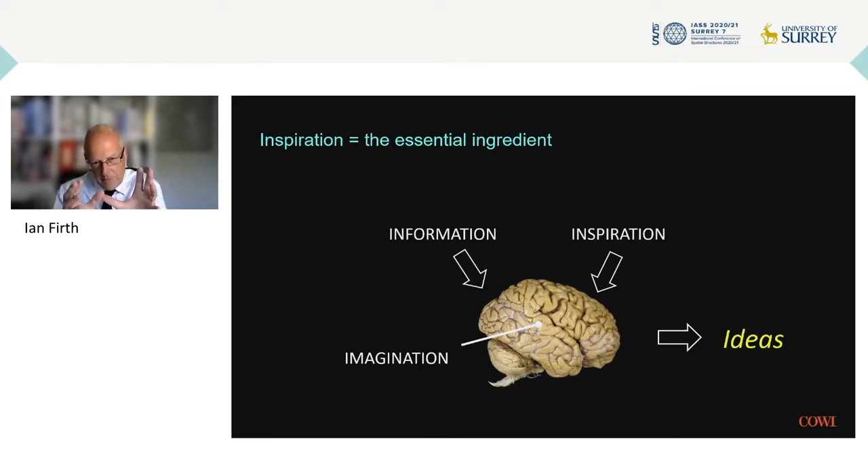Inspiration is a vitally important part of what we do. The stuff that goes into my brain, your brain, is a mixture of stuff, and we use our imagination to make sense of it all in order to generate ideas. But broadly speaking, it's information, the stuff that we learn, research, experience, all the important knowledge that we gain through our careers, that allows us to do the engineering that we do. But without inspiration, it comes to nothing. We need inspiration. So I was delighted to see that topic. And I asked myself, where do we get inspiration from?

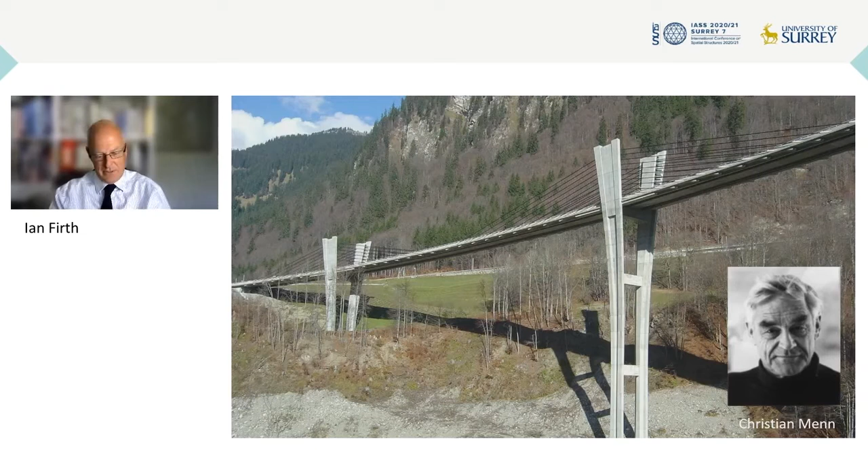Of course, we get inspiration from people. I could list a long list of people. Here's Christian Menn with his wonderful Sunniberg Bridge in Switzerland. Jörg Schlaich is somebody who has been a great inspiration to me. And of course, his son, Mike Schlaich, the firm in their names, Schlaich Bergermann and Partner, continue to inspire people all around the world with the work that they do.

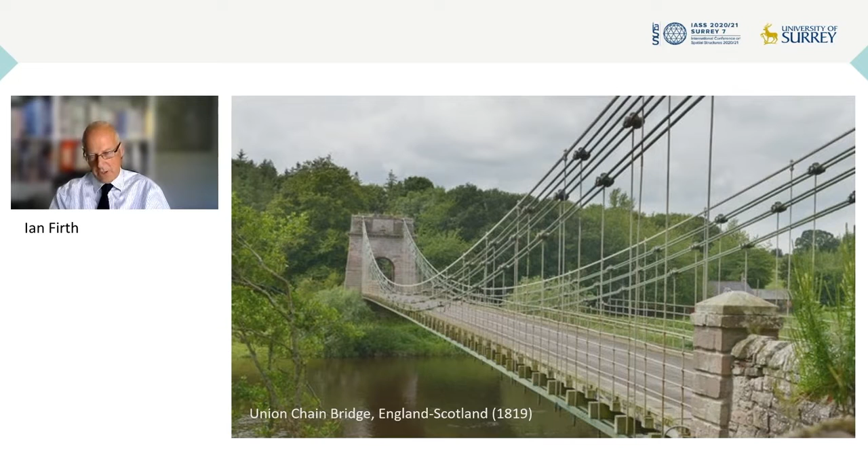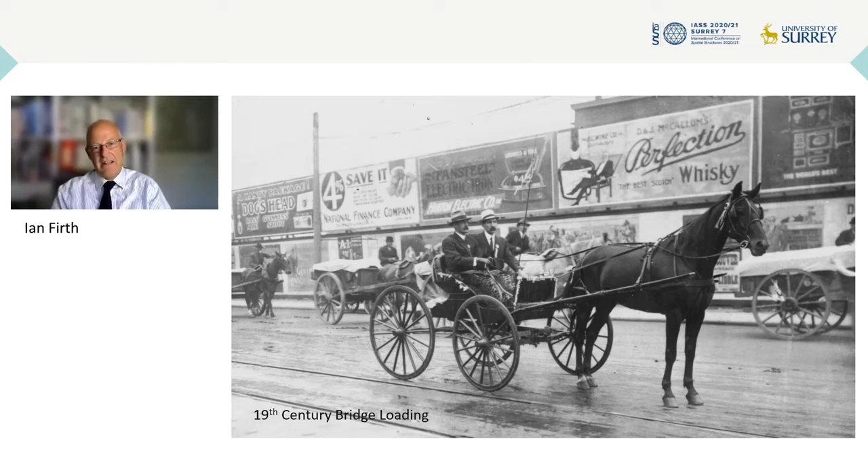Let me think about an inspiration from Captain Samuel Brown, who designed the fabulous Union Chain Bridge on the border between England and Scotland, almost exactly 200 years old. It's currently going through renovation, but it still carries traffic 200 years later. The astonishing thing is that when he was designing it for things like this... actually, this photograph is about 100 years later than the bridge, because there's reference to electric something behind the carriage. So this picture doesn't date from Samuel Brown's day, but you can imagine he had no idea what was coming. This kind of thing was unimaginable 200 years ago.

So do we kid ourselves when we say we're designing for 200 years? We have absolutely no idea what we're designing for. We don't know what materials we'll be using. If we design something today for today's conditions, we need to think very carefully about how it's going to last. Going back to this idea of inspiration - if I, in my tiny career, have been able to inspire anybody, it would be to ask: how do we ensure a future? Can we do better next time? Because there are also things I would certainly not do the same way again.

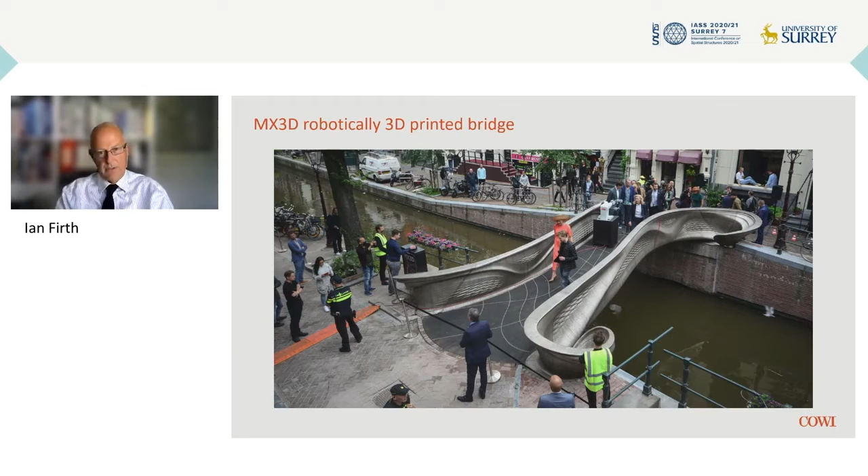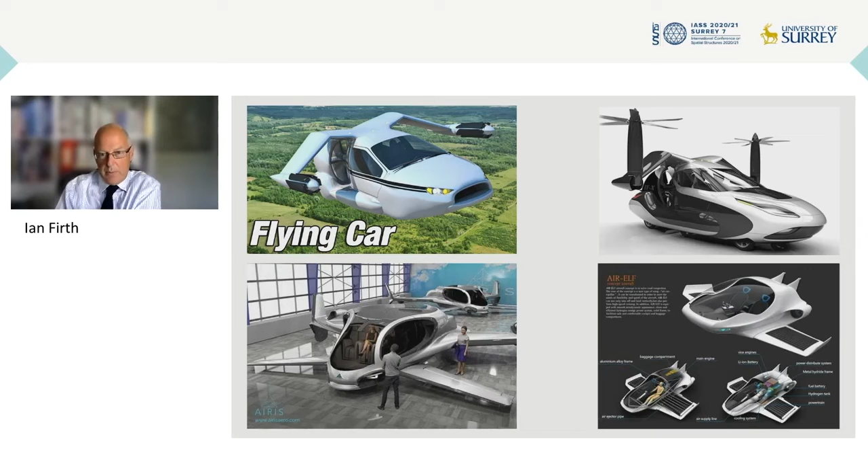And we're into the age now of 3D printing. This is the bridge in Amsterdam, finally installed after a lot of waiting - 3D printed steel. We'll probably be talking about flying cars. We've already got autonomous electric vehicles, which were unimaginable just a few decades ago. These things will be coming, and goodness knows how we'll be traveling in the future. So are we aiming at some kind of ghastly future city, the sort of stuff of science fiction? What are the implications of that? Or are we possibly looking at a future city in 100 or 200 years' time?

I give credit to Will Arnold at the Institution of Structural Engineers for this chart. I hope it's clearer on your screen than mine - it's all rather blurred. What this shows is energy-related carbon dioxide emissions per sector, and the large blue slice is buildings - 39%. That's due to buildings, transport, other industry, and the other slices. The biggest part, by a long way, of energy-related CO2 emissions is due to buildings. That's the stuff you and I are involved in.

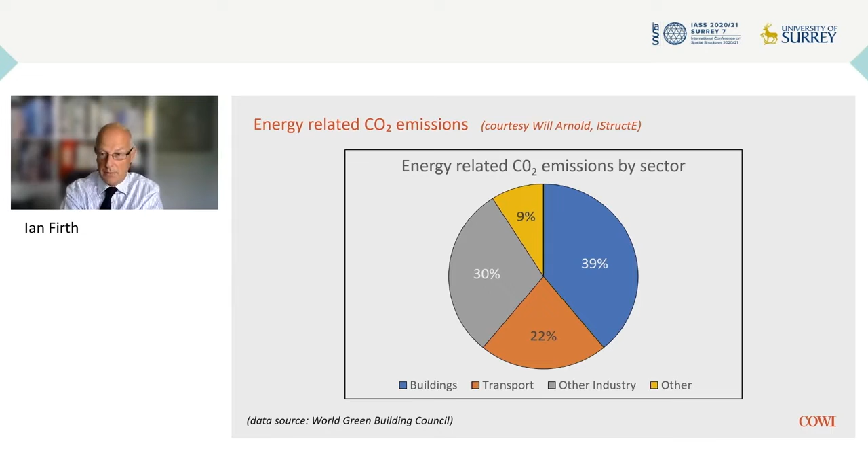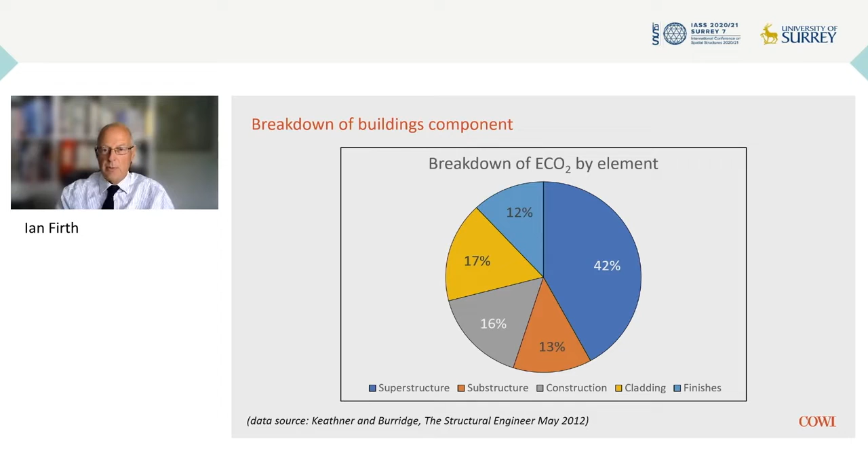Building structures - if we break that down further, superstructure is the largest bit. Now, the delegates for an IASS conference are largely people who deal with superstructure. So the awakening for me in summer 2019 was that structural engineers are playing a very big part in creating the biggest problem currently facing the planet. I'll say it again: structural engineers are playing a very big part in creating the biggest problem currently facing the planet. It's not aviation, the food industry, clothing, or manufacturing - it's structural engineering. It's building structures. It's the stuff we do.

It's the biggest part. And right now, certainly two years ago, our professional institutions and associations didn't require us to do anything about it. Now that's changing, I'm glad to say, because I think not only I, but many others, had that wake-up call. That alarm went off in the summer of 2019. It was too late, but at least it's gone off.

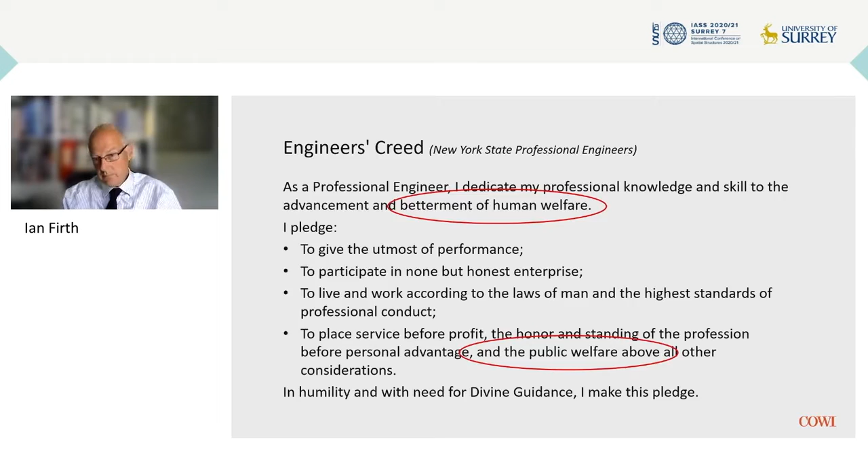Thankfully, last summer, 2019, that was taken up. The UK Structural Engineers Declare, the Institution of Structural Engineers, set this up, following the lead from the Royal Institute of British Architects. And now, around the world, this has been picked up - the declaration about climate change and biodiversity, the emergency that we face.

I haven't got time to go into all the things, but I would urge every one of you listening today, if you don't know what this declaration says, and if you haven't yet signed up to it, please go to Engineers Declare or Construction Declares - just Google it and it'll come straight up - and educate yourself about these things. We all need to sign up to what this is about. So there's my soapbox over.

But the Institution of Structural Engineers, I would say, is really leading the way in this. Will Arnold, who I've mentioned before, and Mike Cook, who you will know, I'm sure he's probably speaking at this conference, is leading the effort. I take no credit for it, other than being a bit of a flag bearer. Please do check out the resources there, like the Carbon Tool, because they help.

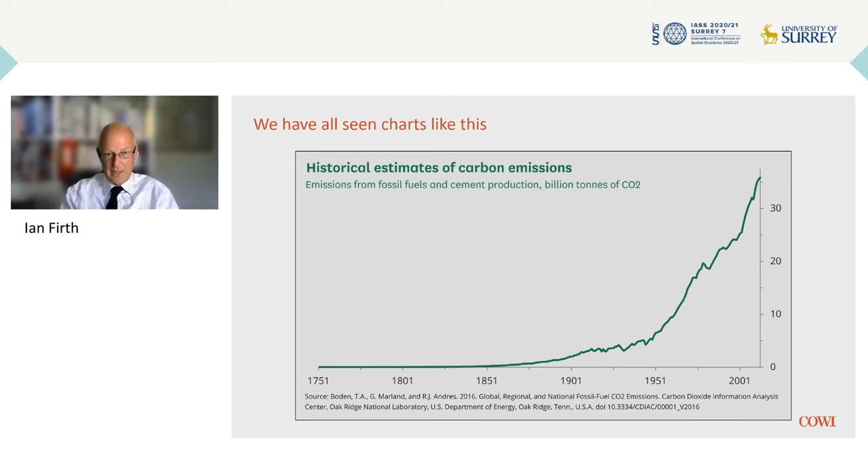We've all seen charts like this, showing carbon emissions growing since the pre-industrial era - a long flat line which then, come the 19th and 20th century, begins to grow, and then growing ever faster. I look back at the title of this conference, inspiring the next generation, and the inference is that the previous generation, my generation, has got something worth inspiring. But if you look at the last 30 or 40 years, I'm not sure we can really hold our heads very high if we're responsible for the biggest part of this.

You could see other charts - this is exactly the same figure but broken down by country. It's very clear normally on my PowerPoint, so I hope you can see it. A large number of countries, for the last 10 or 15 years, the lower curves are all turning down, which is fabulous. So many countries around the world are beginning to address this problem. China and others, unfortunately, are not yet.

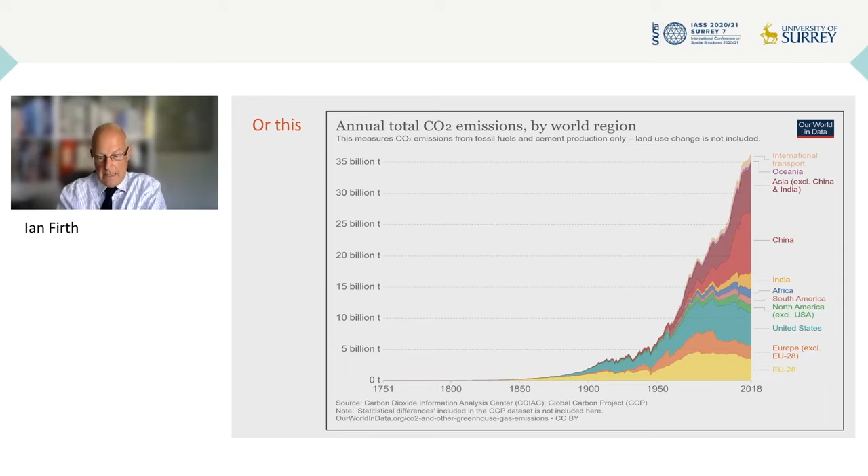So there's a really big issue, and each of us needs to do what we can, even though many people are saying, 'Oh, it's such a big problem, we can't possibly do anything ourselves - what can I do when it's such a big problem?' That, of course, is thinking that leads to disaster. We all need to do something.

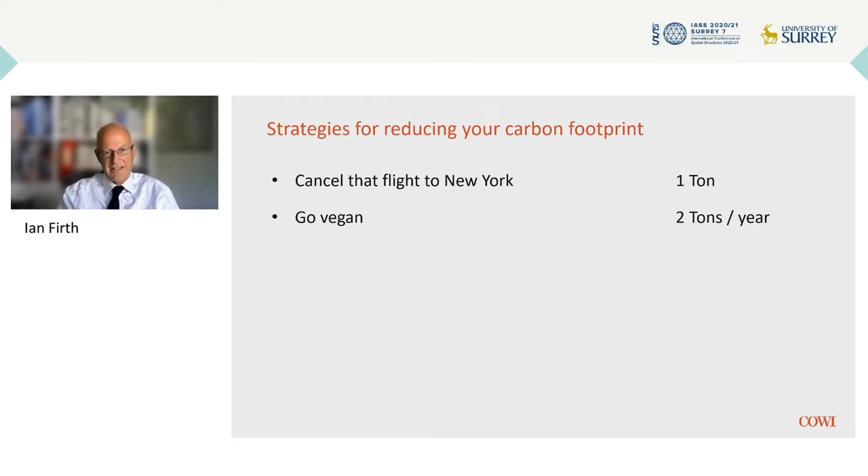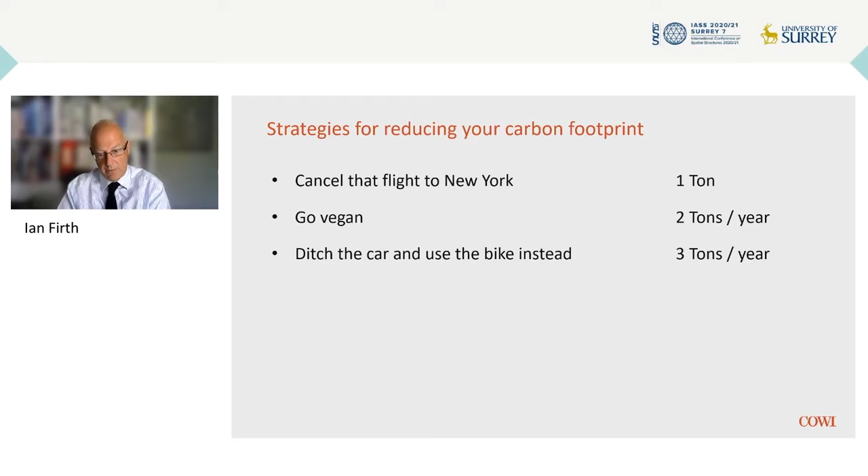And of course we could do it in a small way. You can cancel that flight to New York, save a ton. You could go vegan and save a couple of tons - I'd rather keep my beefsteak. You can give up the car. I've gone a little way towards this because I've now got electric cars, but unfortunately I charge my car from the mains, which is still driven predominantly by fossil fuel. Not until my electricity supply to my house is a responsible supply from renewables will it genuinely be a good thing to go electric.

But here's the thing: we could design our building structures 20% more efficiently. That's actually really quite easy when you start thinking about it, if you look into what we could do. This is based on a structural engineer designing 40,000 square metres of new buildings a year, which is quite typical, with a typical carbon footprint of about 250 kilograms per square metre - quite typical numbers. So you'd be responsible...

If you're doing that, you're responsible for 1,000 tons of carbon a year. So design 20% more efficiently, and you can save 200.

In the bridges world, which is the one I inhabit, it's actually a little bit more difficult to design 20% out. We're already designing to a minimum weight. We have to, because the penalty on weight is that much more significant on very long spans. It's very challenging, but let's say I could design 10% more efficiently, and of course I could if I really put my finger to it and worked hard, and that's based on some new figures down the bottom.

So again, the message is that we have the opportunity. Not only are we a big part of the problem, but we have a big part of the solution in our control. We can do something about it.

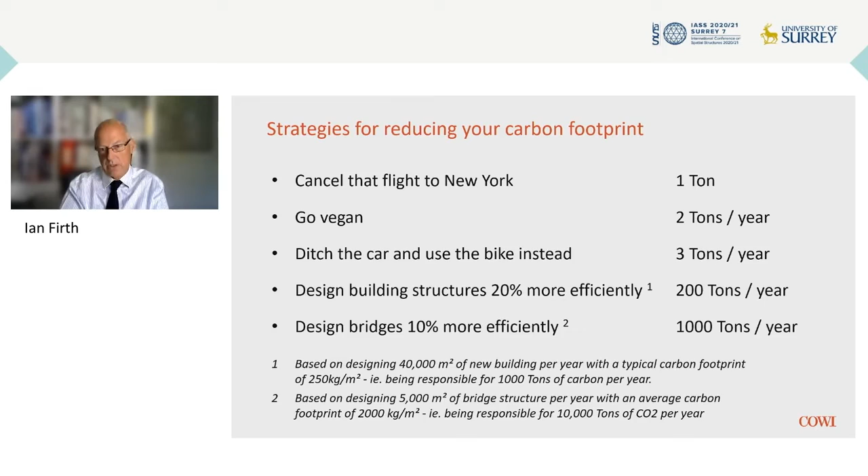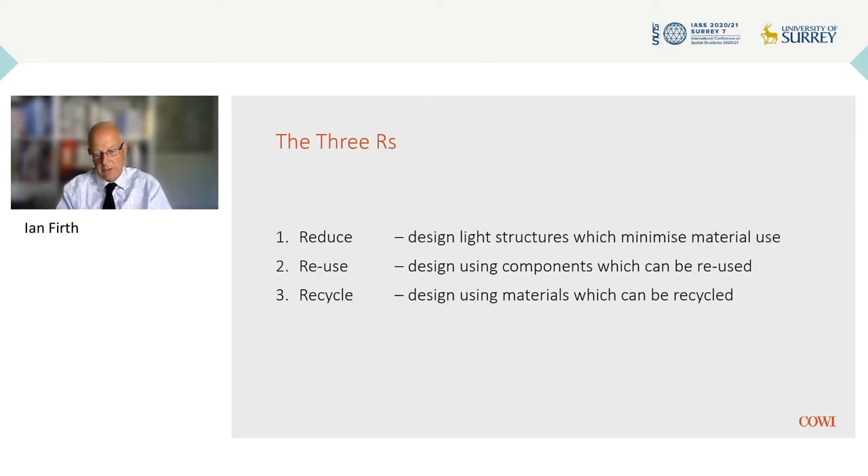So you all know about the 3 R's: reduce, reuse, recycle. Reducing is to go lightweight and use a minimum amount of material. Reusing is very interesting because we're seeing components and modularizations happening, beginning to think about how we can design our structures as components that can just be reused. It challenges us to think in those ways. Recycling, of course, we're already doing quite a lot of that. We could do more. But let's go back to that figure.

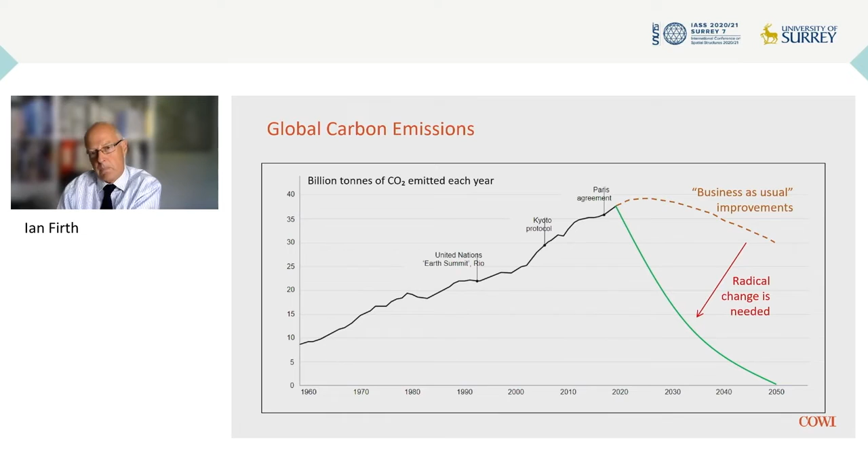But to get to this requires some very, very radical change indeed. And I think if you see that same thing on the earlier charts, it just doesn't look likely, does it? And as we already know from the IPCC report, which was published a few weeks ago, they don't think so either, and the scenarios that they have published are frightening indeed.

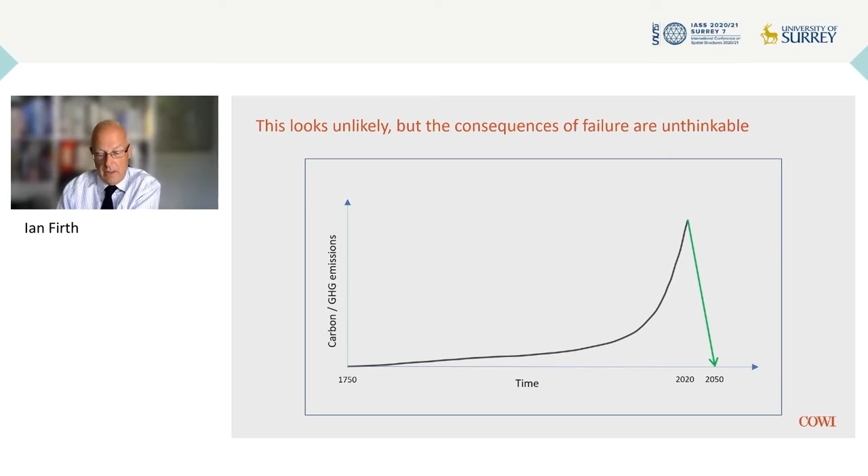So, like I remind you again, we structural engineers are responsible for a very large part of the problem, all right? But we are also able to think about the solution.

So, in terms of inspiring the next generation, I'm thinking that the next generation is going to be inspiring us. So we should be doing more. We should be refusing to build new things, and that's already happening. And we could certainly be regenerating, making much better use of existing structures.

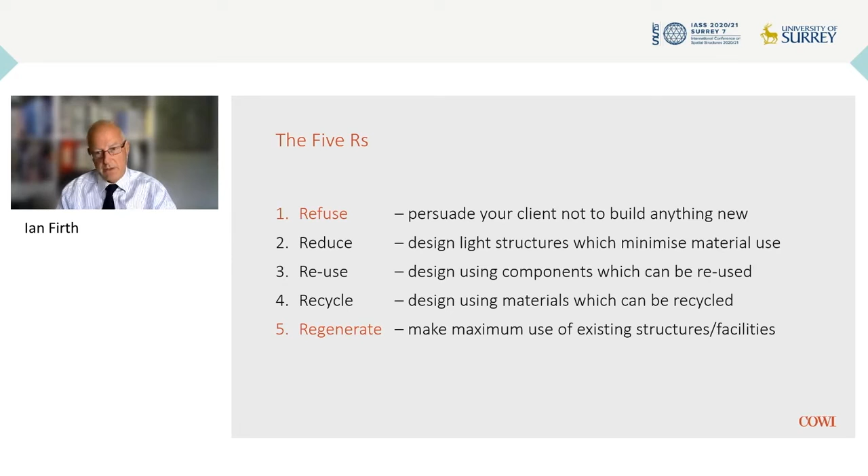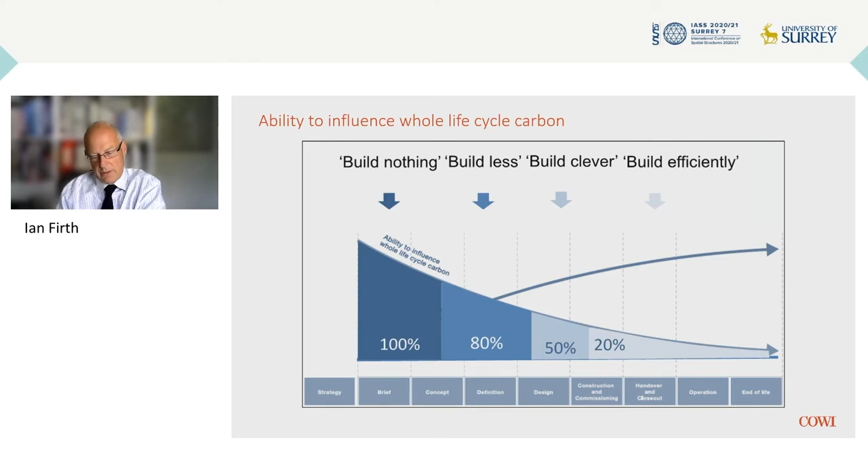And we all know, of course, that the best time to influence the decision is right at the beginning, when we could actually influence the brief, because later on you could tinker with the details, but you're not going to really make much impact. My early career, I started with Flint Neill, as you heard, and relatively early in my career I was working on the strengthening of the Severn Crossing.

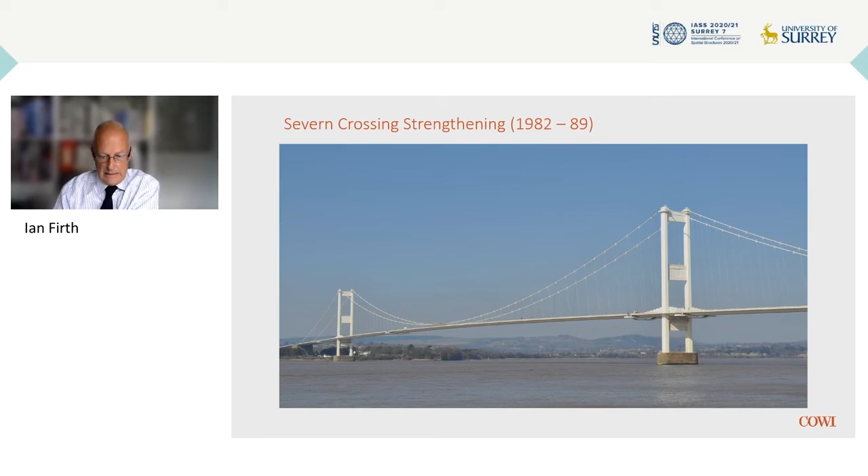A wonderful project to be doing. And of course, back then in the 1980s, I always like to show the picture from this side because I was working on the Wye Bridge, this bit down in the foreground.

But back then in the 1980s, nobody was talking about climate change. Nobody was talking about carbon. But nevertheless, the same principles apply: to keep the asset open, to do the strengthening, to do the minimum necessary to give it a new lease of life.

Brian, you might remember the numbers, but I think we added a few percent to the weight of the bridge in additional stiffening and so on, and increased the live load capacity by, I don't know, 100% or something. I don't remember what it was, but it was a massive change.

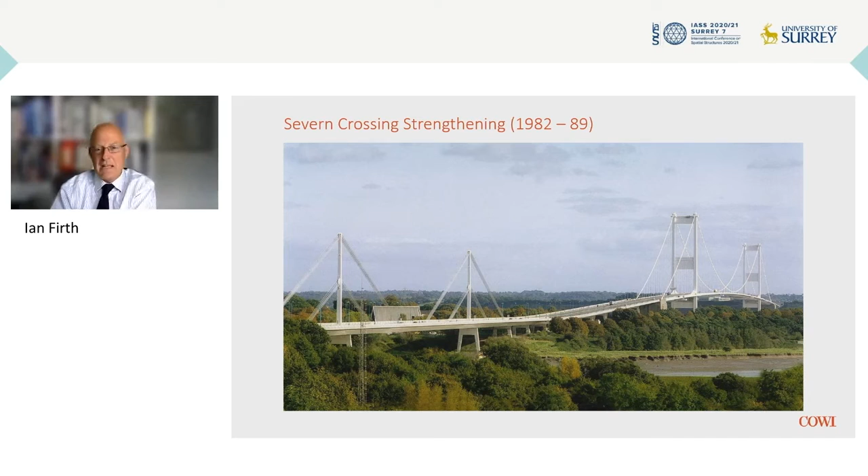That is the sort of thing we're supposed to be doing, making use of existing infrastructure and so on. I'm just going to go a bit more quickly here because time is running short.

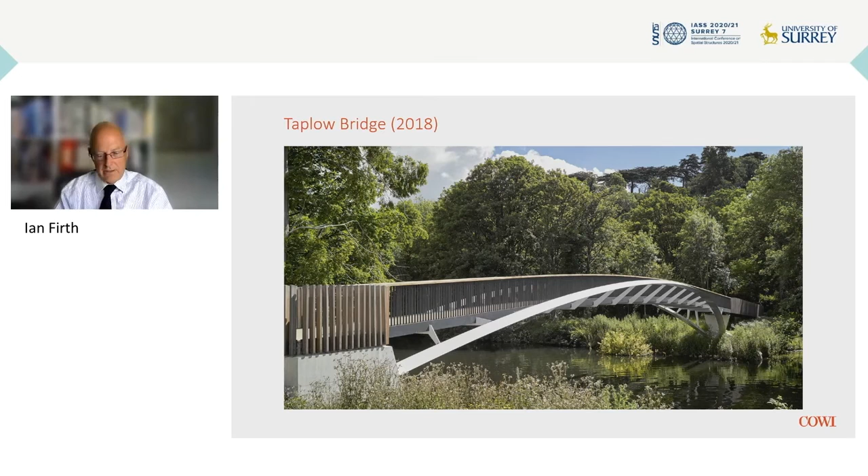This is a bridge I did quite recently, a new bridge, where clearly by this stage, 2018, I haven't yet had my wake-up moment, but clearly designing lightweight was important, and we were able to achieve that here with a very, very light and slender arch, using those ribs, those sort of outriggers, acting to stabilize the arch so it can be really, really light and thin. A delightful little footbridge.

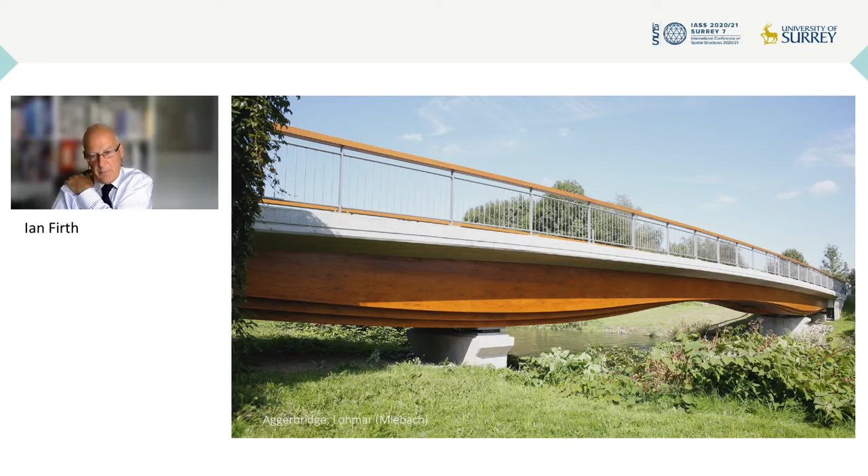But you could start using timber more. This is by Miebach, nothing to do with my work, but just as an example of timber and concrete in composite action. This is something we'll be seeing more of.

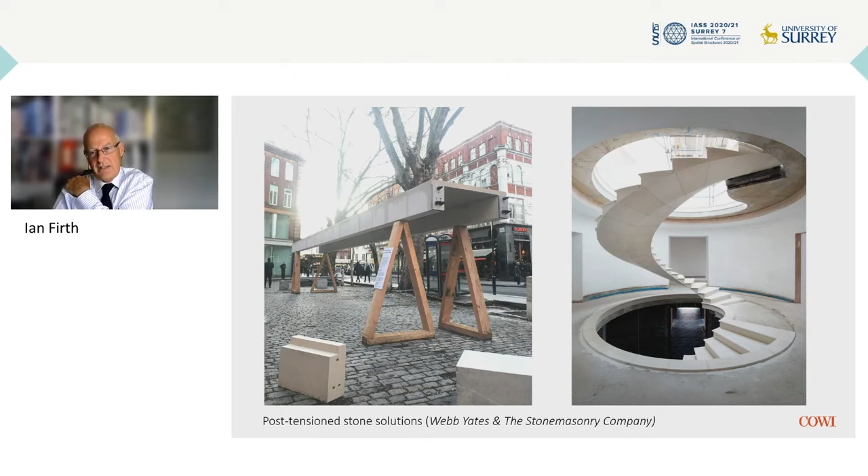Stone - wonderful work of Webb Yates and The Stonemasonry Company - use post-tension stone. That staircase on the right really does stack up. The stone blocks are post-tensioned together. This photograph was taken before the balustrade was put in, just to demonstrate that it does work. And we'll be seeing much more of that. I'm absolutely convinced of it.

Going back to that stone arch that I showed you, 2,000 years old, we're going to see more of this going on. People using local stone, local material, looking at the carbon in the structure, not using massive industrial processes to produce concrete. Why take a block of stone out of the ground, which has got a strength of, I don't know, 300 megapascals or something, and then crush it and process it and use a whole lot of energy in order to produce a block of concrete which has got a fraction of the strength. It makes absolutely no sense at all.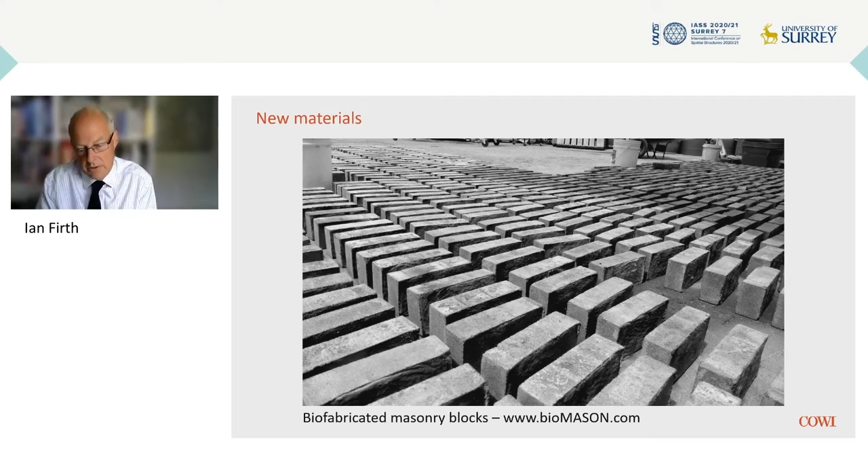This is an interesting material, something I recommend you look into. Biomason - this is just a startup. These are biofabricated masonry blocks with a similar strength to concrete ones. These are mycelium, this is bacteria grown locally on site. Carbon negative. There are lots of people doing things like that.

I'm having difficulty reading these slides. I don't know, I really hope you are not.

But infrastructure is a very different thing. I just want to finish with this really, because infrastructure is different to buildings. To build less is obviously a useful guide in both cases, but sometimes in the case of infrastructure it can be the wrong solution. We need to be building responsible infrastructure, of course, but we need to be building nuclear power stations and wind farms and all the tidal energy things and so on that we can be doing.

And in the bridge world, of course, we need to build lightweight, but bridges are essential for societal needs. And as we know, capital carbon, i.e. embodied carbon, is less of an issue than the in-use and operational carbon, which dominates. And outcomes - how the asset is used - is much more important than what it is.

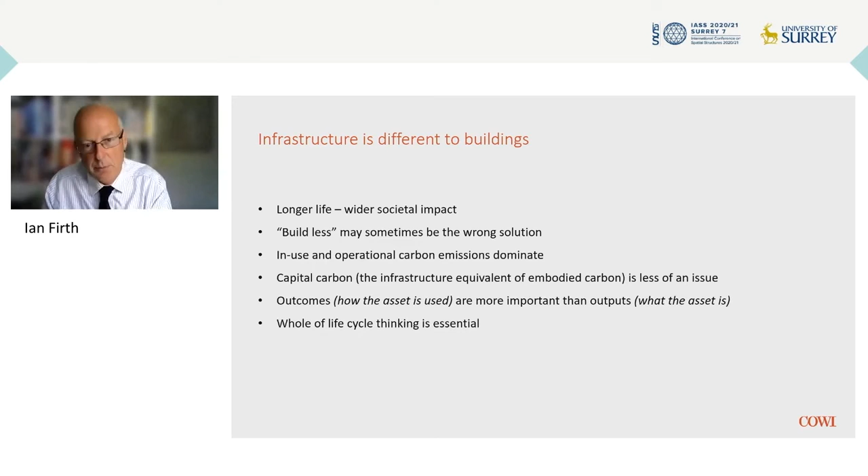So if I build a new bridge or I design a new bridge, I'm going to ask myself, well, what is it? Is it a new bridge to a new airport or something, in which case it's probably not very responsible. But if it's a new bridge that allows an opening up of something which is environmentally responsible, then of course it's good. So what it uses, what it's for, is much more important than what it is.

This is a chart, again you won't be able to read it, but the purpose of this is just to show the capital carbon, left-hand column, is tiny by comparison with the in-use carbon, particularly in transport. So the operational carbon and in-use carbon is what matters. And of course the designer, the bridge designer, has very little control over that.

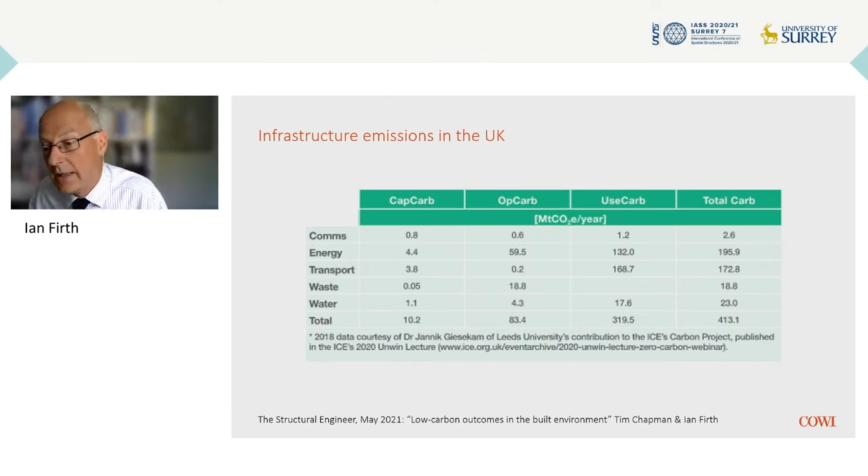I'm just going to finish very briefly by showing two things. One, I'm working on a family of footbridges in glass and carbon fiber for Network Rail, which is interesting because on the face of it, is this a carbon responsible thing to do? Obviously pedestrian bridges and pedestrian and rail travel is good from that point of view.

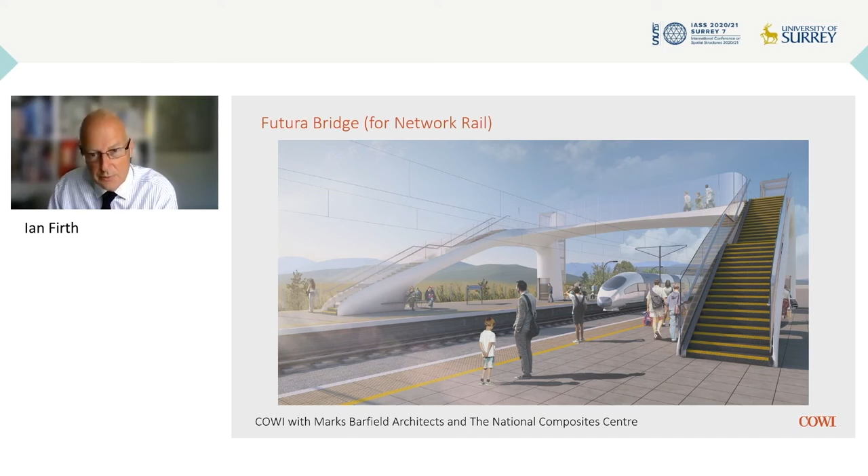And what's interesting is we're looking currently at whether we can use basalt fiber and natural foam cores, and natural materials as far as possible. But this is all part of an updating of the railways, which frankly hasn't changed much since 200 years ago, 100 years ago.

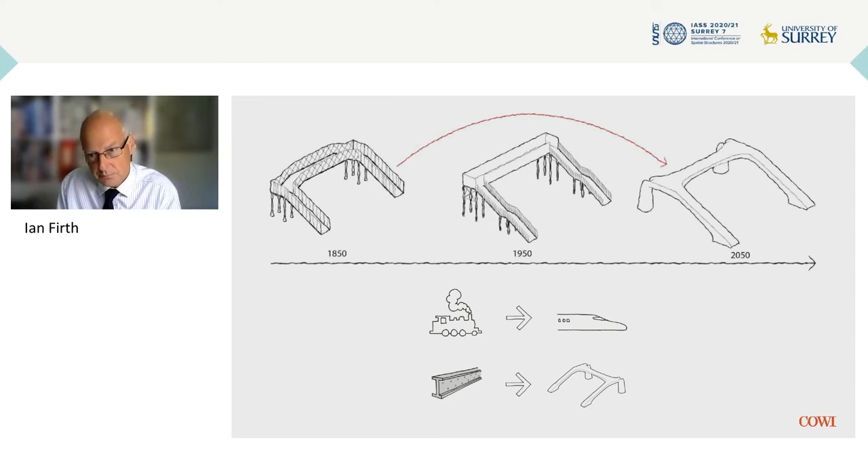I'm going to skip on because time is running out. But the cross section is basically very straightforward.

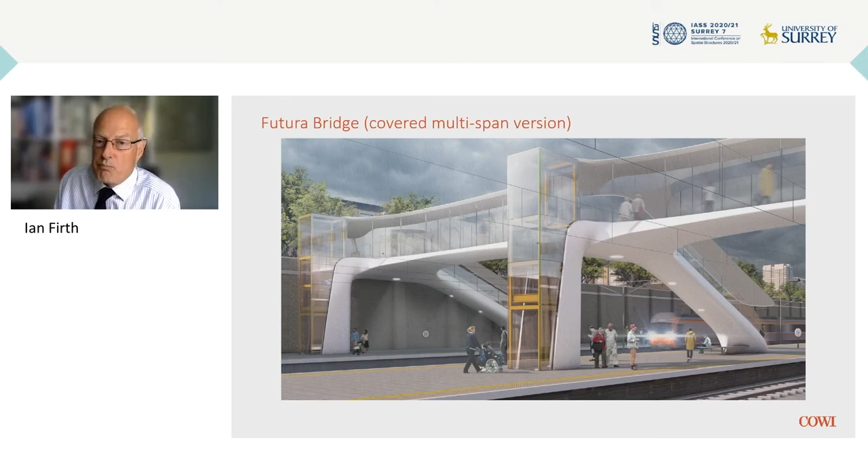The other thing I want to talk about is big bridges, because a lot of my work is with very long spans. Imagine very long span and multi-span suspension bridges, where they can actually be a very positive contribution to a zero carbon economy—if electric vehicles are driving across this and saving people from flying, for example, who knows?

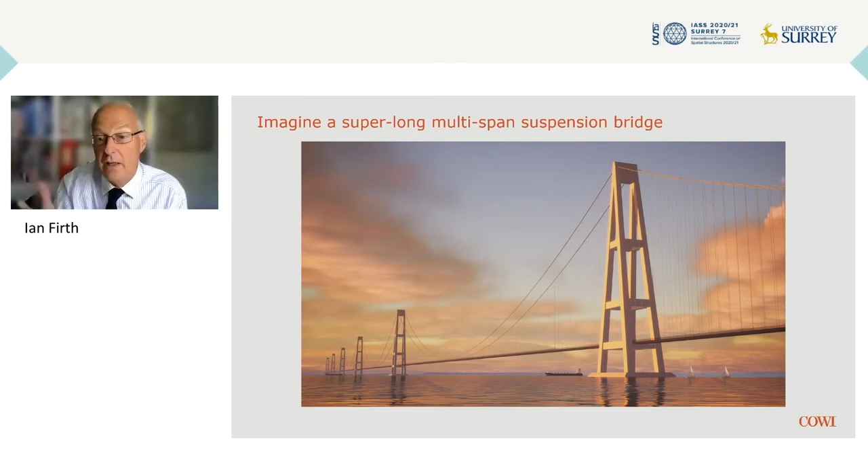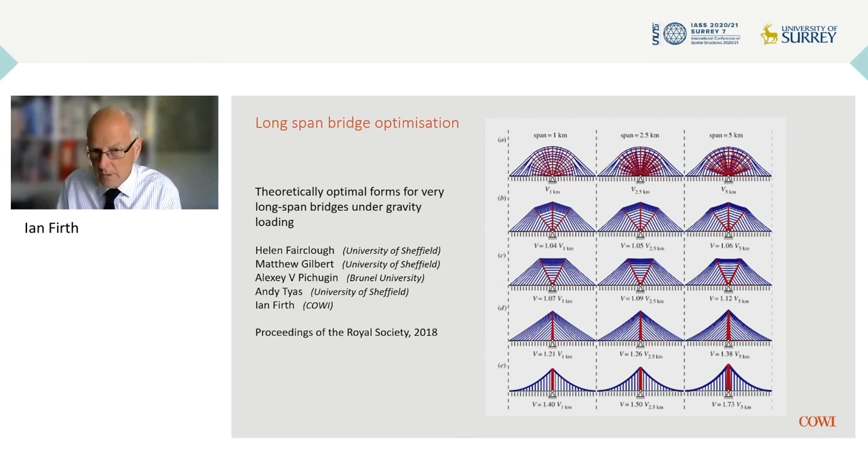This is a really interesting piece of work, which I can recommend to you, and as I say, I take no credit for it. There's another picture saying a similar thing. The bottom line is the minimum weight with span increasing across the bottom of the chart, with different structural forms being generated by the software.

This is an algorithm that generates the form that would produce the lowest weight, but you could apply constraints to the software that make it go into certain shapes. Anyway, it's really interesting stuff.

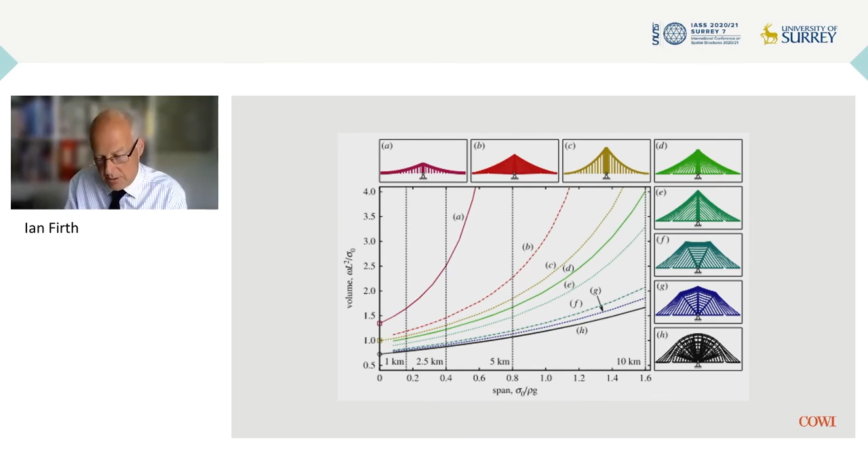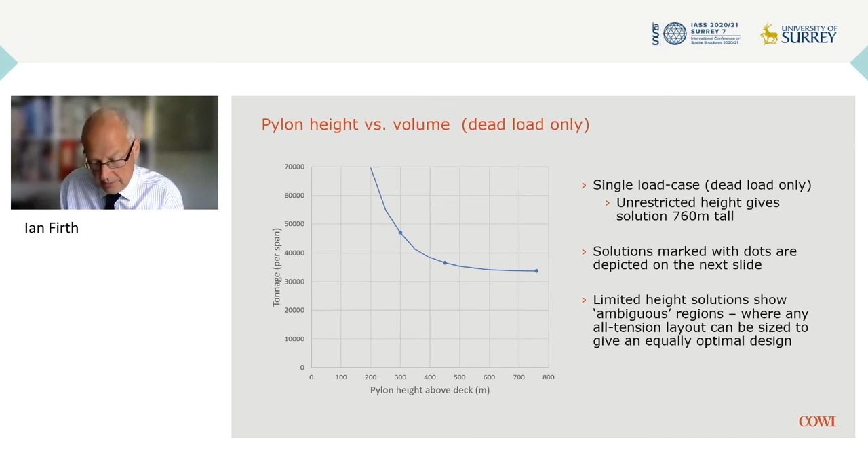This is just one illustration, and here's one particular aspect of it, which has to do with pylon height. If you let it go—this is now with dead load on its own—you end up with a much taller pylon in a suspension bridge than we currently use, if you wanted to go for the minimum weight.

I really don't have time to go into these pictures now, sadly, because my time is up. But this is really interesting work, and I can recommend it to you.